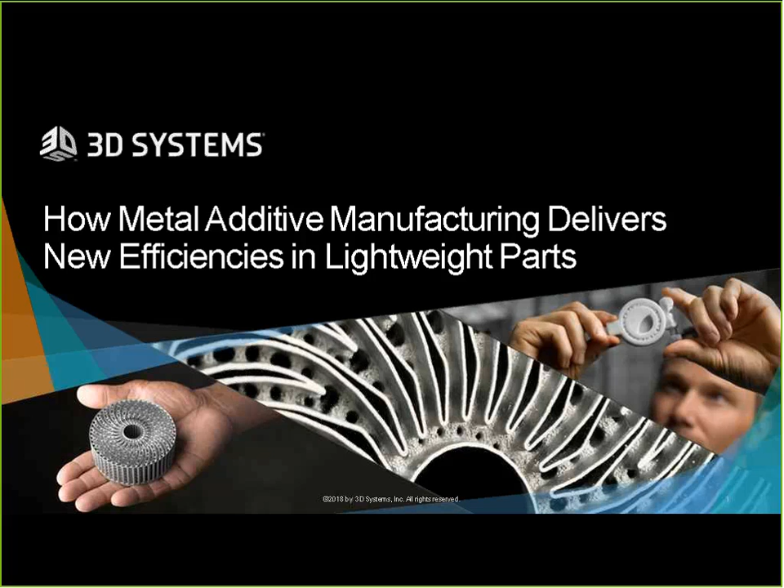Just a quick agenda of what we're going to go through, and really just explore the technologies, the use cases, and the research for lightweighting metal.

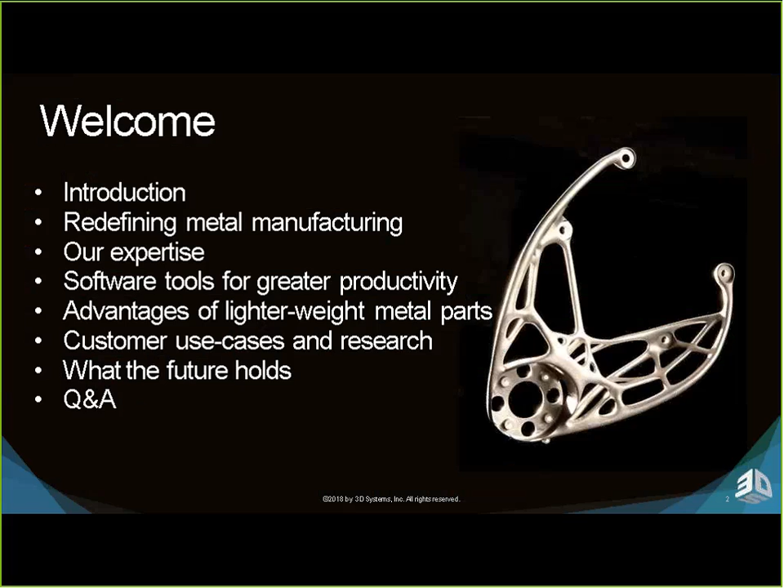I'd like to introduce Brian Hodgson, who is a lead expert in our aerospace team based in San Diego, California, and who has been leading much of the research into metal lightweighting for customers. Over to you, Brian.

Good morning, everyone. As Rachel said, I lead our applications division for aerospace. My background is in 10 years of disruptive engineering technologies for aerospace supply chains. Now what we do here at 3D Systems is help companies industrialize and disrupt their own supply chains using additive. So today we're going to be talking about metal lightweighting, which is a very broad term. Specifically, we're going to focus on the use of powder bed fusion machines and software to lightweight metal applications.

First, a little introduction of 3D Systems. 3D Systems is uniquely positioned to discuss this topic and help industrialize this production. Founded by Chuck Hull, who is the inventor of 3D printing, he's still our Chief Technology Officer and really a guiding hand on the technology side.

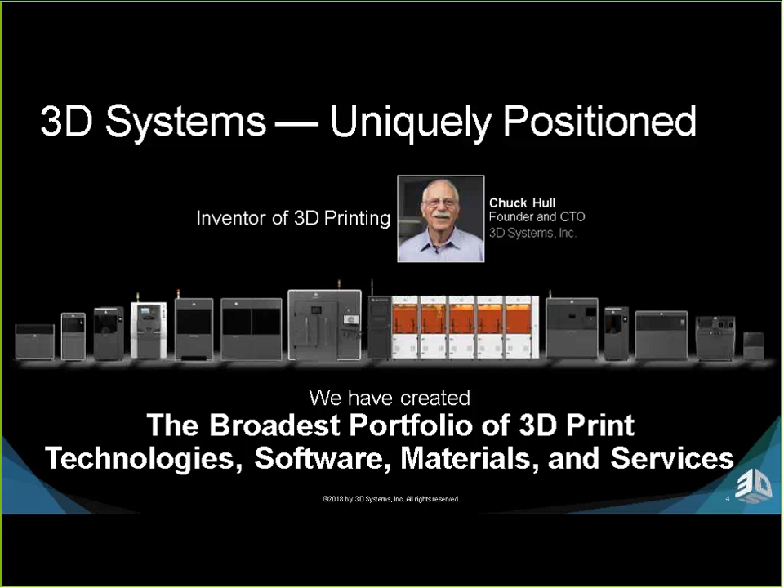So as we go forward, what we're really going to be focusing on today is lightweighting for powder bed fusion applications. But just know there's no need to try to fit square pegs into round holes here. We have a broad portfolio of technology, software, materials, and services to walk through this.

So to start, a little layout of 3D Systems. We're a global organization with locations all around the world. I'm based in San Diego, California, but we have centers of customer innovation for metal in Denver, Colorado, as well as Leuven, Belgium. We have a production CIC being established here in San Diego, and Rock Hill, South Carolina, as our plastics customer innovation center.

So really what we have established here is the ability for customers to interface with our advanced teams globally and be able to adopt the technology and really learn it in concentrated innovation environments.

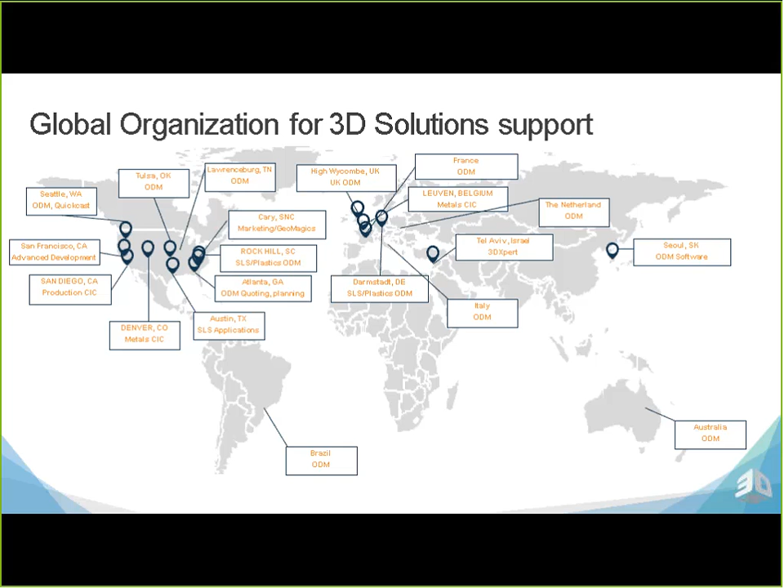So, redefining metal manufacturing value equations. Today we're really going to hammer in on how we're doing direct powder bed fusion printing from metals. One theme you're going to hear throughout the entire time is design, design, design. Every single thing you're going to do with powder bed fusion is going to start with design.

If you take an object that's designed for traditional manufacturing and then you throw it into a 3D printer, it does not magically get better. Actually, in general, it will be more expensive and less effective. So this is a critical component, and it's why we're addressing lightweighting. You must change and improve the design and add value to the part to make it fit for 3D printing. And you do that in multiple ways.

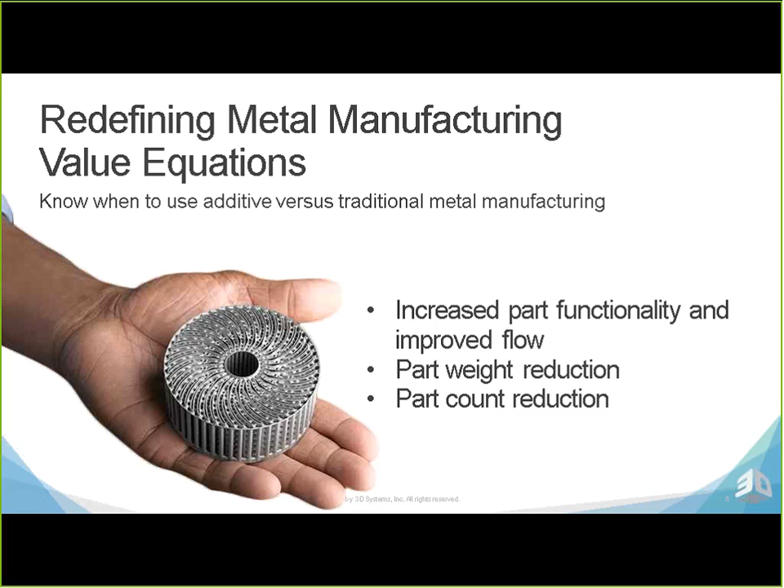You can increase functionality. If it's a fluid flow device, like the model heat exchanger pictured here, you can improve internal fluid flow, reduce part weight, or simplify your supply chain through part count reduction. All of these are good things, but you have to add value to the part before it becomes a cost-effective venture for powder bed fusion.

Since it all starts with design, let's talk about how we design. Traditionally, if you started using powder bed fusion even 2 or 3 years ago, you would have to start with anywhere from 3 to 5 different software platforms, everything from wherever your CAD package design is, walking through to a build setup.

Something like a Magics or Materialise or additional software. Then you have to walk through the native software of whatever print capability you're using, and then post-processing would be done on a whole separate software.

What really is helpful in that world is 3DXpert. We actually offer a software here that allows you to shortcut all of those different translations of software and bring it into one. So I'll talk a little bit about 3DXpert software today. Really what we're going to address is how do we lightweight and how do we use this as a tool for developing 3D print components and applications.

I'll talk a little bit about lattice work, conformal cooling, support optimization, build simulation, and then a few of the tools built into the process that allow you to really step it up a level in advanced material application. We're also going to talk a little bit about SolidThinking.

They make a software called Inspire for topological optimization. That's obviously a great software for really developing a reduced weight metal application for structural components.

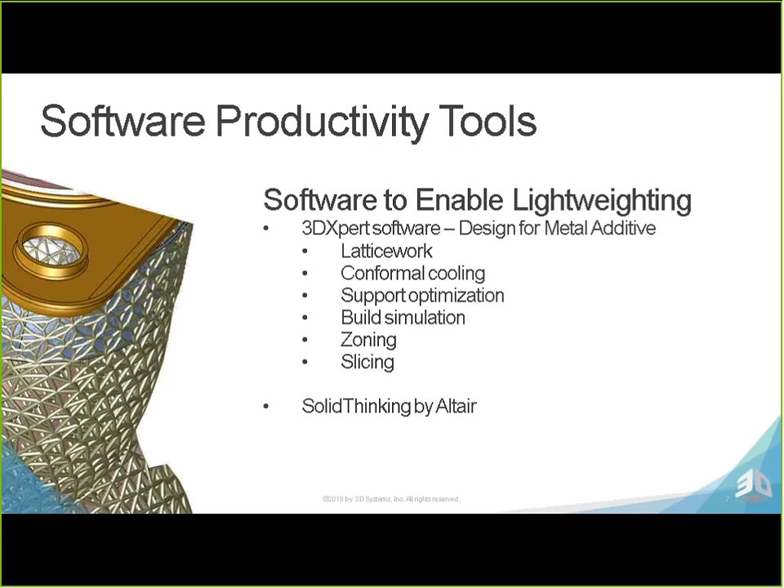If you go to the next slide, we're going to dig into 3DXpert a little bit first. So what is 3DXpert? As opposed to the past where you would start with your CAD and move through multiple environments, perhaps convert it to an STL or any number of non-parasolid files or meshes, 3DXpert works directly with any CAD package, allowing you to input your data, whatever your control functions are.

Obviously this is critical in any industrial environment - aerospace, automotive, healthcare. Being able to use the same support function, the same CAD support function that you use internally, and then transition into 3D print space.

So that's where 3DXpert pulls the file in. You're in that environment, you're able to position the part, optimize the structure, and then do a full design of the component. As opposed to just having the component sitting on the platform, maybe just angling it, it also allows you to create supports that are then able to pull back out of 3DXpert as a traceable file. It's a traceable CAD package allowing you to make modifications within that environment.

So changes in hole dimension, offsets, last minute adjustments to the part for printing or even just for part modification don't have to be done through multiple software translations. They all get to happen in the same environment.

After that build environment is done, it has some advanced software to help you with your scan path. Think of how to best use scan paths just like your speeds and feeds on a traditional grinder or mill. This really is the nuts and bolts of how you lay out how you're going to melt the metal.

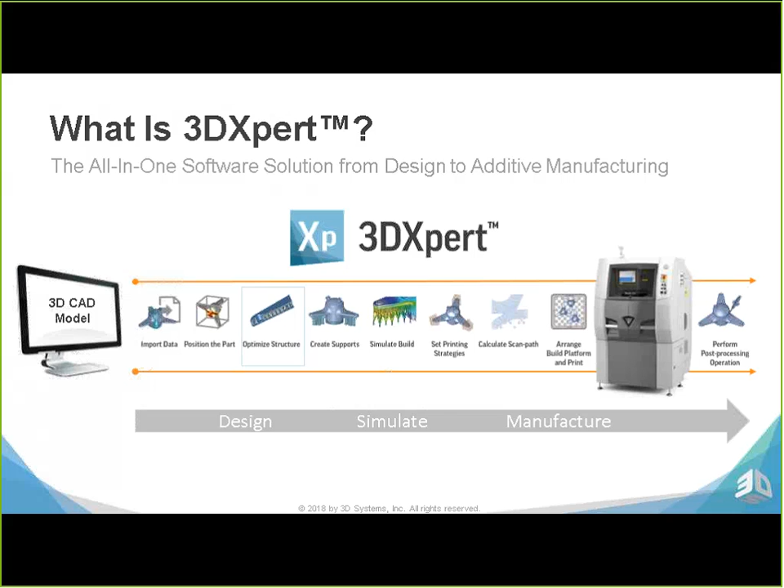Next slide. So let's talk about what optimization tools you have. We know 3DXpert now gives us an end-to-end solution that allows you to start at CAD and finish up with post-machining. But how does it help you lightweight that part?

Well, one of the primary functions is lattice. If anyone on the call has worked with lattice before, obviously as a parasolid it is a very data-intensive, bulky process. So most, if not all, other CAD packages out there will allow you to make simple lattice structures, but the more you design, the harder it is to manipulate.

Traditionally what people will do is fill up a volume with lattice and then begin to boolean sections of the lattice out to meet the form they're looking for. The problem with that in additive manufacturing is that as you've booleaned away sections of your lattice structure...

Depending on where it generated from, you're going to end up with very different hanging support function pieces that may not print well or at all, and then a really suboptimal lattice. 3DXpert really fixes that in kind of an innovative way here.

It allows you to render and design lattices in a live space that is not clunky and is very fast and robust. So this will allow you to take a single cell, design that lattice, and really design it for 3D printing, up into designing a whole cell lattice that will make sure that it's always a self-supporting lattice without a hanging piece.

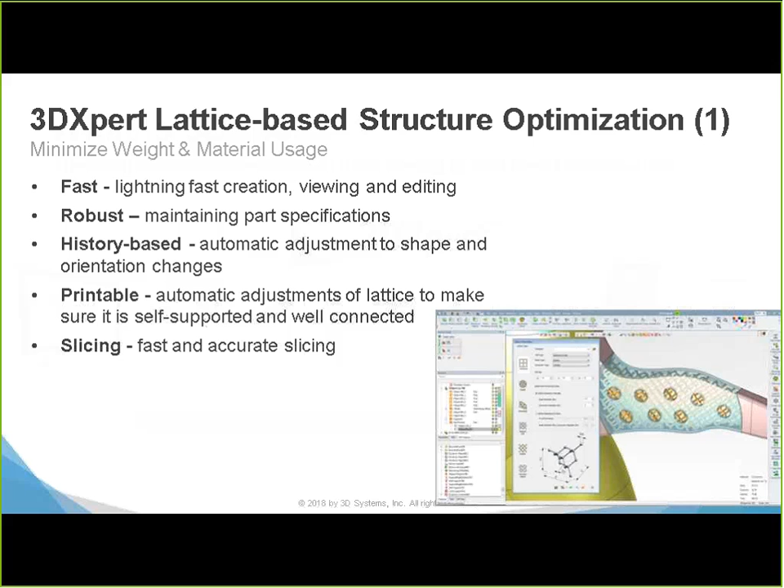So it does this in a kind of robust history-based way. What it does is it allows you to build a lattice structure, not just to look like lattice, as in some CAD packages, but really to be a lattice designed for 3D printing. We'll talk a little more about that on the next slide, how we go about that.

The way this is done is the lattice is rendered directly on your screen, but really the calculations and equations for developing this lattice through the component aren't fully defined until the slice. So what you're able to do is see and render your open lattice, play with it, make it fit the exact function you're looking for, without having to deal with millions of faces in Parasolids.

Here's just a few examples of what comes as an open part of the software. We've got nearly a dozen different set lattice structures. These are all variable - you can set based on density infill, anything from solid lattice to stochastic, from gyroids to Schwarz to just traditional cell lattice.

What it also allows you to do is design your own. So it allows you to take a cell structure, design your own internal lattice, and then propagate that throughout as a fill space, interior or exterior, that you're looking for. And then assign that either to be a whole cell lattice or to interface with the sidewalls.

So really the concept I want you to walk away with here is that it's not lattice as you're used to in a traditional CAD package. It's lattice that's meant for 3D printing. It's really purpose-built, because that's really the only way you're going to build this lattice anyway.

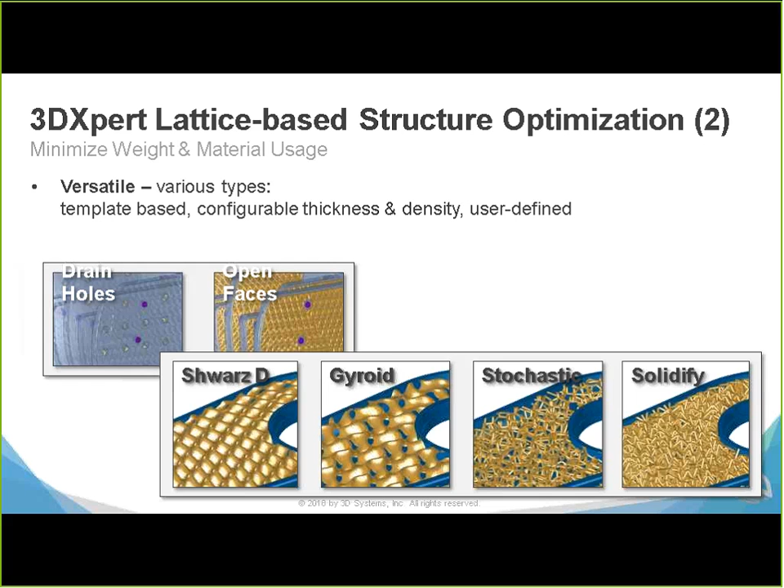So finally, now that we've talked about how we want lattice designed for 3D printing, not just to look good on a computer screen, what do we do with it? How do we use that lattice? This is a function built into 3DXpert that allows you to analyze and optimize.

To date, if you were to build any sort of structure once you got above 5 by 5 by 5 inches, you've really created millions of Parasolid faces that, unless you have a supercomputer or two at your disposal, you're not going to be able to analyze. What we've designed into this feature is an analysis FEA tool specifically for lattice cell structure.

It's important to note that obviously you're not going to be using something like a lattice structure for any fatigue-rated items. So anything subject to high cycle fatigue, you're not going to be using lattice for its fatigue properties. What you're using lattice for is really to fill space and add internal structure to a thin wall component.

But how do you know what structure you've added, and how do you know what density infill you can get away with? Obviously, the less the better. And what kind of stresses are going to be on that lattice? Is it going to break immediately, or have you made it overly robust?

So this is where our lattice-based structural optimization comes in. It allows you to analyze that lattice to say, yes, we've got high stress concentrations, your von Mises stresses are well underneath the yield strength of whatever you're using - titanium, aluminum - and really design an internal or external lattice fill structure that provides a known level of support.

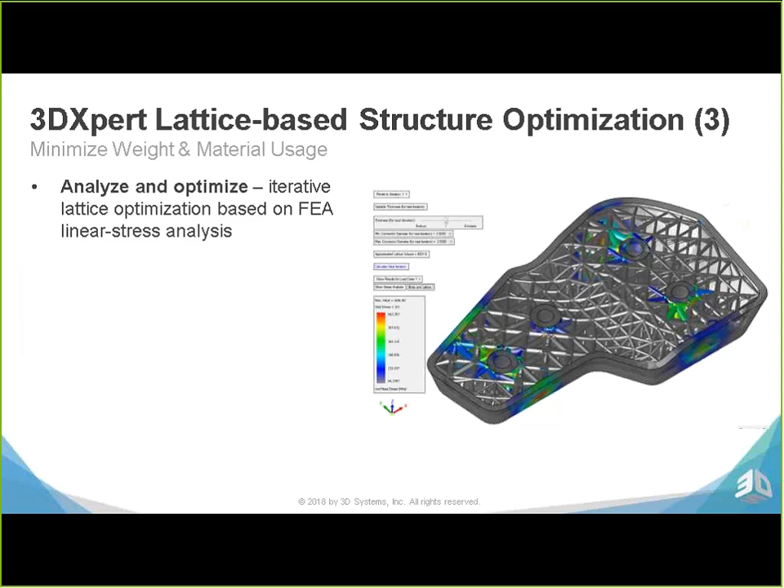This is critical, and we could spend the entire 35 minutes just on lattice lightweighting, but I want to give everyone a taste of where 3D Systems sees the lightweighting work going. We see it initially as a software setup issue that bleeds into how you build it with hardware. So now we've talked through how we're designing something for lightweight, and we've gotten to the printer section. This is our ProX DMP 320 solution, DMP for direct metal printing.

In the aerospace or automotive industry, anytime you need repeatable production, your powder chemistry is going to be critical. We could spend the entire time walking through the details of powder bed fusion, but one thing I want everyone to walk away with from this slide is that there are really two types of powder bed fusion systems.

Fundamentally, there are powder bed fusion systems that operate with a vacuum base, and then there are fusion systems that operate just through an inerting purge gas system. If you have an operation using just inerting purge gas with a recycling powder system, it will spend the first hour or more purging the system with argon or nitrogen. Then every time material is deposited across the powder bed, you'll see a spike in oxygen content. Remember, as fun as 3D printing is, it's really nothing more than a very advanced welder with a very fine powder, and a critical step in welding is how much oxygen is at the weld bed.

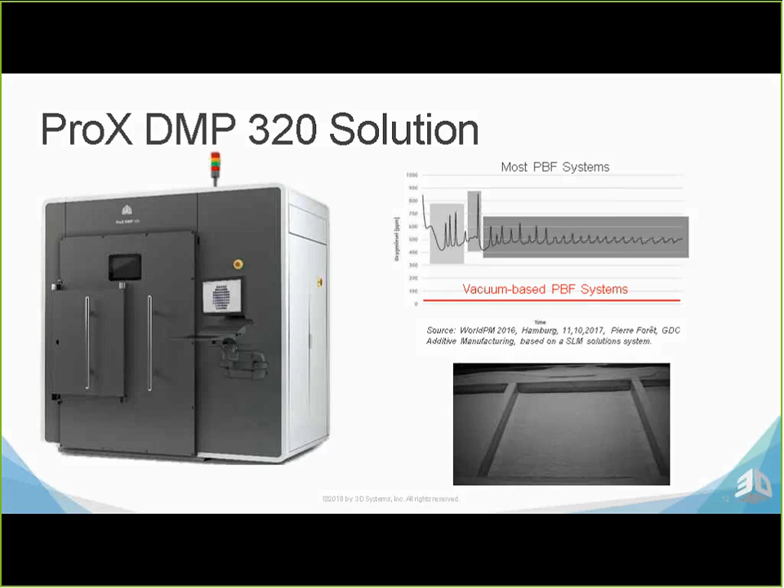Let's go to the next slide. Really what I want to spend the majority of time on here is why are we lightweighting, and then what components have really met muster that make sense from a cost standpoint, an overall total cost of ownership.

And really have walked through intense qualifications either with FAA, NASA, or NTSB. So first, since my background is on the aerospace side, a very early key adopter of this technology has been the satellite industry. And so I've got a few pictures on the right I'll explain in a second, but really the reason the satellite industry is a prime adopter of this technology, especially in the powder bed fusion systems that

are vacuum-based, is because they pay a tremendous amount of money to fly components. If you're flying your components at a geostationary orbit, you're somewhere in the $20,000 to $50,000 range per kilogram that you put to geostationary. Obviously this is going to vary based on what you're flying, but as you can see, every single kilogram really in space counts a lot in the tens of thousands.

So reducing that fuel use by lightweighting your component is really going to help you reduce the cost. And actually, what's kind of a more important note for those of you in the satellite industry, what we've found to date is that people don't actually reduce their overall launch bill.

What they do is they use that weight reduction, that mass savings, to add more functionality to the satellite. And in most cases, it's batteries. They'll add lifetime. It allows them to provide additional value to their customers by not flying weight around that's not necessary.

So why else in the satellite industry are we doing this? You want to improve part performance, right? So the ability to stiffen your ribs and your construction components allows you to fly larger objects or add functionality to those parts. The ability to lightweight anything allows you to add more battery power or really to optimize flow paths.

So we'll talk a little later about radio frequency components. Being able to optimize those components in a way that does not add cost really can improve the functionality of your satellites.

Another major part of the satellite industry, why they're a very early adopter, is what they call the buy-to-fly ratio. And so obviously they use a lot of advanced materials for satellite production. Because those materials are very tight specifications, they'll end up having to buy very large billets, and then for every 40 kilograms they purchase, oftentimes they only end up using 1 kilogram.

So when we talk about lightweighting, we're not just talking about material reduction, we're actually talking about material overall use reduction. So this is kind of one of the compounding benefits of additive: in traditional manufacturing, when you want to reduce weight, add complexity to a component, you're inherently and often exponentially adding cost.

It's actually the opposite for additive manufacturing. As you increase complexity, increase part functionality, reduce weight, and increase surface area to volume ratio, you are functionally reducing cost by reducing metal. So in an additive system, it actually is really a beneficial cycle to say, as we focus on which components to use, let's add more complexity, not less, and that really helps with the cost justification, helps make it a functional part.

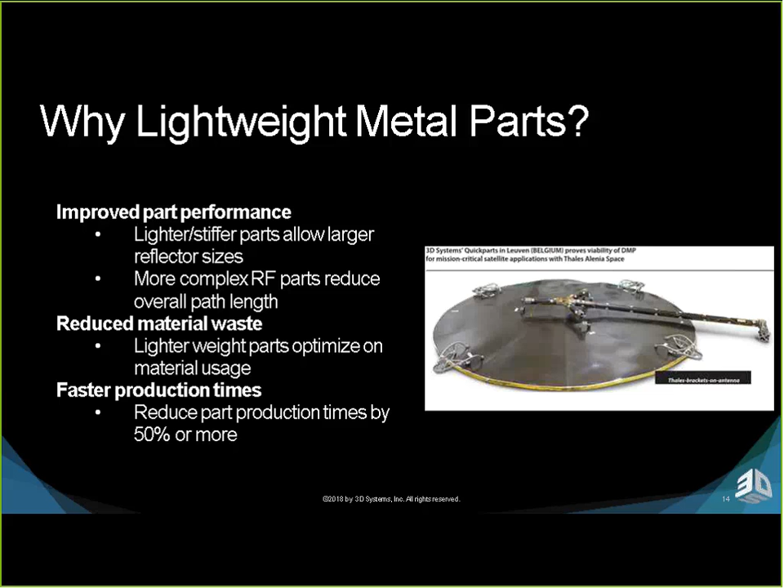To the next slide here. So let's really dig into what this example I've had on the right is. So this is something we've had for a while. It's a partnership we did with Thales Alenia, and it's for antenna brackets for geostationary communications satellites.

If you look at the part on the right, obviously this is done with an inspired generative design. This is topological optimization, basically taking the primary components, the force bolt structures, applying your worst case loads, and then iterating, in many cases tens of thousands of times digitally, to find out where you actually need metal.

Now, I want to caution you that anybody here that's used topology optimization equipment, whether it's Altair or anything else, what you'll find is that it really gives you a base structure for what needs to be printed, but it does not do all of the work for design for additive.

Right, so what it does is it allows you to understand where you do need metal, and then what you need next as a next step is skilled design-for-additive engineers that understand how to combine what metal is necessary with a structure you can actually print.

Oftentimes, adding a little bit of metal, a few grams, even a few locations, allows for a self-supporting function that significantly reduces your overall cost. So in this case, we say it's an optimized bracket. It is, but it's optimized not just for strength and weight, but also for 3D printing. The end result here is we were able to reduce their production time by 50% and give them a 25% lighter piece. Now, there are 4 pieces per satellite bracket. These have been in orbit for nearly a year, and they have a long-term plan to continue to manufacture these.

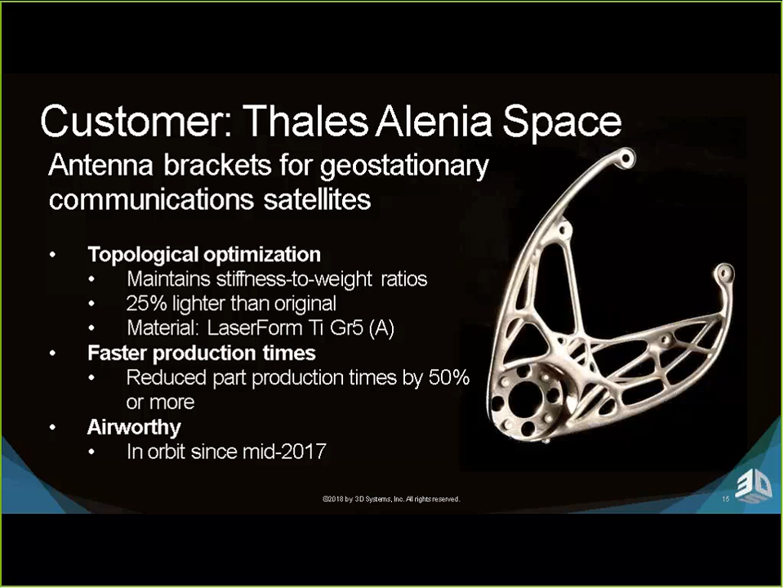So as you go through, you'll see a lot more of this kind of operation. Here's a component that, again, using a software like Altair is very beneficial for lightweighting. That's not the only key to lightweighting.

In this case, we actually worked with Airbus Defense and Space to produce a radio frequency filter. This is a Ka band filter, so very, very high frequency, which requires a significantly fine surface finish. If you look at the top right here, what we had to do is take traditional radio frequency waveguide design and really throw it away, and start to go back to the fundamentals of design practice of radio frequency.

What we found is that the way RF waveguides and filters are designed today is actually quite difficult to manufacture additively. But the way radio frequency likes to move and be filtered is a very organic, self-sustained design that, in this case, reduced weight by 50% and improved passband rejection. So again, here's another component where a full design-side redesign allowed for a 50% weight reduction, and it's been in orbit for going on half a year now.

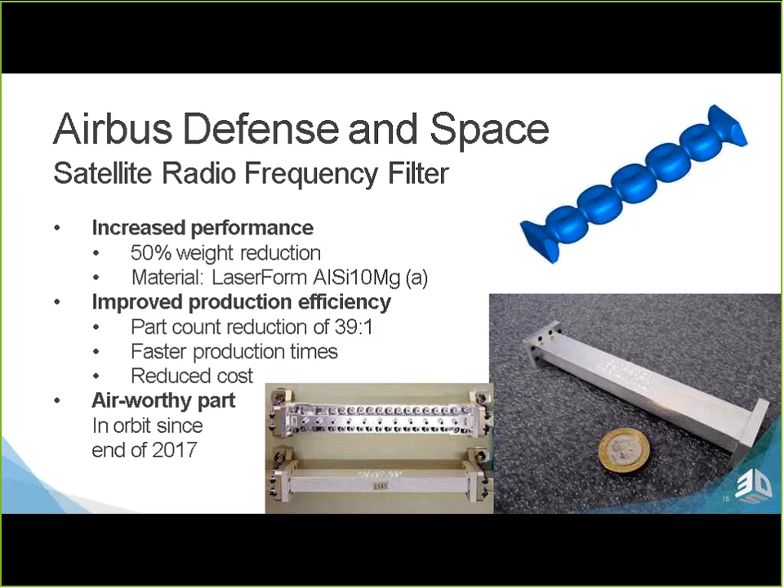We're running low on time, so we're going to hit a few of these relatively quickly. You can always follow up. This is work we're doing with the European Space Agency - it's a separated combustion wall chamber. What this does is allow them to combine multiple combustion chamber functions, again through design, but also allows them to reduce overall density by 88%, because it turns out adding exterior structure and kind of a lattice, think of a truss-style system, is what they needed to both maintain the part rigidity itself, but also allows for better external cooling.

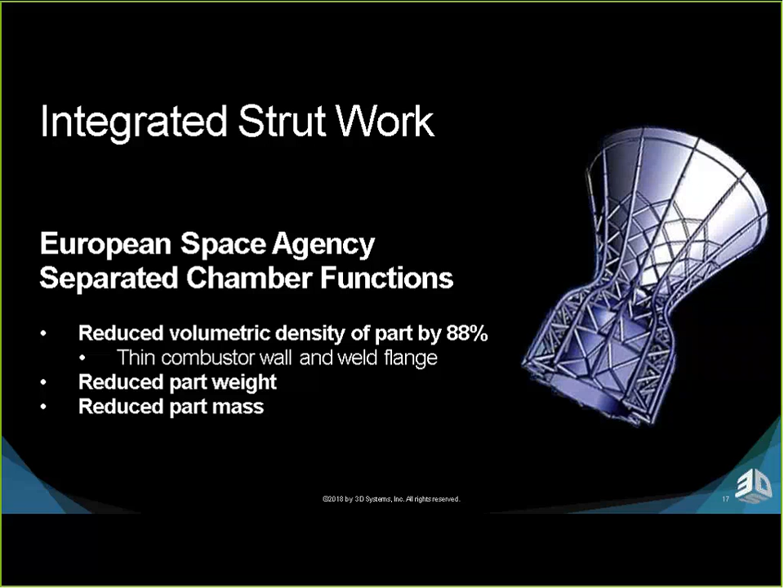So again, we take a component that's traditionally manufactured and redesign it for its purpose. So as opposed to designing fluid flow passages for what angle you have to drill it, we design fluid flow passages for how fluid needs to flow. That path, alongside using an external lattice structure, allows us to really get the best of both worlds while still cutting part weight.

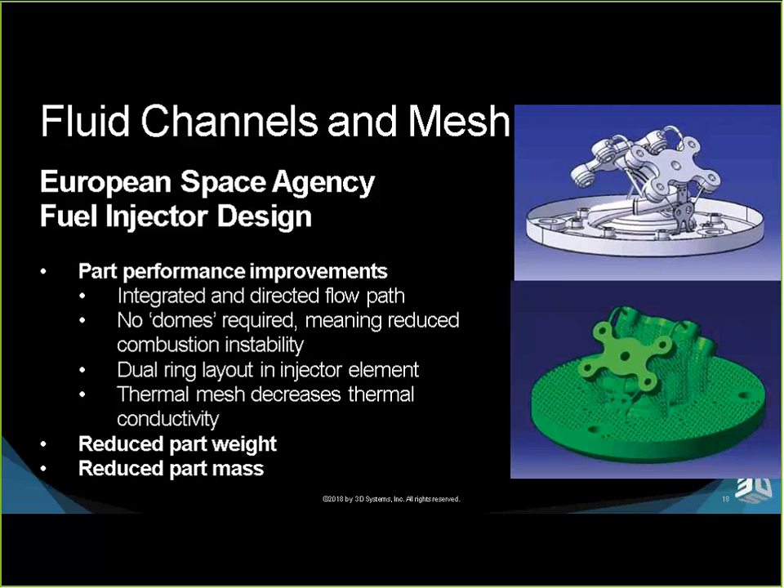So here's what I'm going to call lightweighting 1.0. In a lot of cases, you'll want to lightweight your component but really you've got a functional design already built in. Like I said, using the traditional design straight out of the box with additive is rarely the right decision.

In this case, what was done is we took a piston head and an impeller. We've taken the internal components of those and replaced them with a lattice. On the impeller section, obviously there's an area for a drain hole and an open space. What we've been able to do is reduce the target weight by nearly 1 kilogram. On the piston head, however, just to avoid post-operations and post-welding, we were still able to reduce part weight by some 20 to 30% by filling with lattice and then leaving that powdered infill.

It's roughly about 70% of the density of the melted powder. Through a post-sintering process, you leave the powder in, sinter it in place, and then there's no more drainage needed, but still a reduced weight component. As I mentioned earlier, you would often want to drain the powder, but in this case it actually worked out to be a lighter weight component that was fully functional while leaving the powder in and sintering it in place.

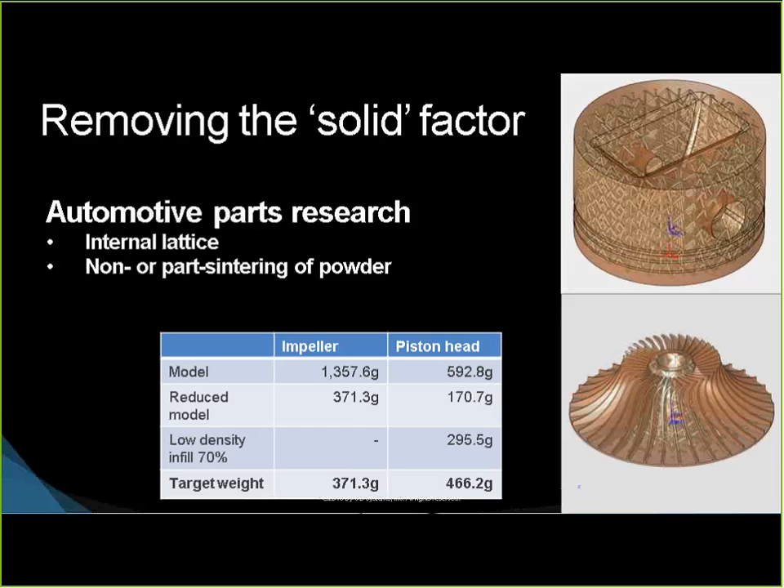So here's another automotive application, and this one really hits on every subject of lightweighting and optimization. Generally, for an intake manifold, it would take an aluminum casting, and as you're building through castings, you've got complex gating, minimum wall thicknesses, a lot of material that really is for the casting process, not for the final result. So the original aluminum casting design is really going to be limited, meaning you cannot add lattice structures or really go to super thin walls.

But what you find is if you really are trying to optimize a structure like an intake manifold, one, aluminum is not the best metal for it. Titanium really offers you a better strength to weight ratio. And two, the optimized structure for this doesn't necessarily need thick casted walls. It's only necessary because of the casting operation.

So transitioning to direct metal printing, we're able to optimize the geometry. Now we don't have to worry about fluid flow of the casting itself, and we can really minimize that wall thickness down to what's necessary, as opposed to what's necessary for castings. This allowed us to go down to even a half mil wall thickness using titanium and get an overall mass reduction of 50%. So this really hits it all.

As you'll find when optimizing these structures, especially if you started with aluminum and you're transitioning to a more advanced metal, you'll need significantly less metal to meet your design size. A tremendous amount of what engineering organizations are used to designing for is really designing for the process. So what we encourage people to do is to rethink that design-for-process mindset and focus instead on designing for 3D printing for applications like this.

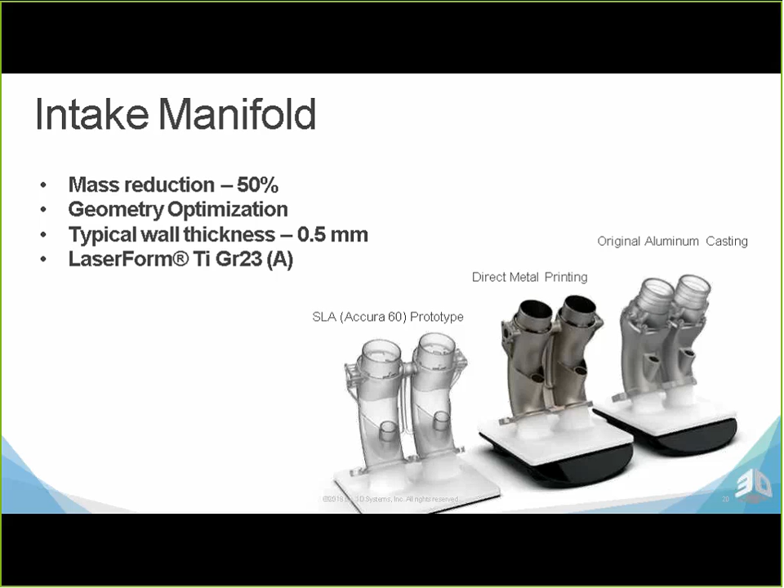Wow, right on time, only a minute over.

So let's talk about the future. First of all, there's no possible way anybody can predict the future, but we can talk about where metal printing is heading right now. Obviously, if you were to Google 3D metal printing, you'd see dozens, if not more, types of 3D metal printing, and there's more coming out every month. The use of metal printing, both in application technology and in the materials themselves, is advancing at a breakneck speed.

Trying to keep up with that is the growing sophistication of software. As we push into new advanced metals and new advanced lattice structures, software that previously was more than sufficient to analyze parts is now finding itself lacking. How do you analyze advanced lattice structures? How do you analyze non-isotropic material properties? Obviously the software world is going to have to move fast to keep up with the mechanical structures and applications being printed.

Combine that with the fact that now we're able to push closer to the envelope of ideal, a lot closer to the mechanical properties really required to meet an application. What that's going to require is better print monitoring, and you'll see companies working a lot more aggressively on this. There's a little bit out there now, traditionally called melt pool monitoring, which is really a kind of thermal weld pool monitoring.

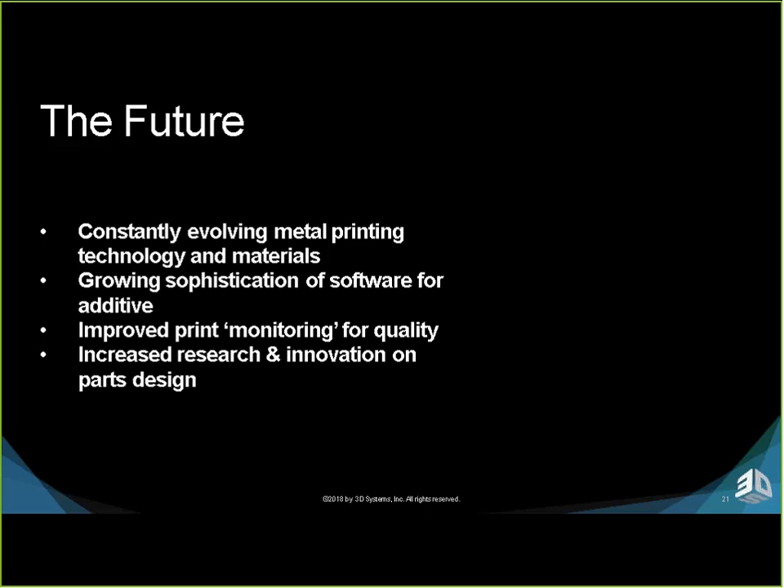That's it. That's not all I can talk about, but that's all I'm going to talk about today. So I'm happy to move on to questions, and I think we've got some good submissions coming in, and we'll start to answer some of those.